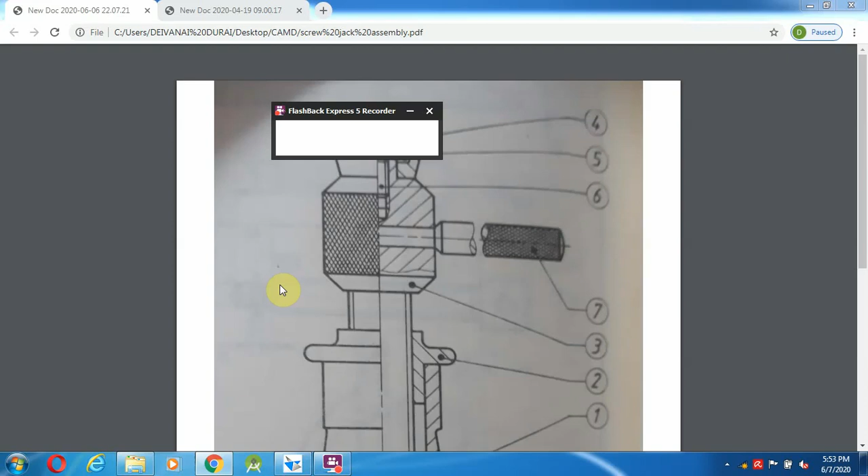So in this video we are going to discuss the screw jack. This is the screw jack assembly diagram.

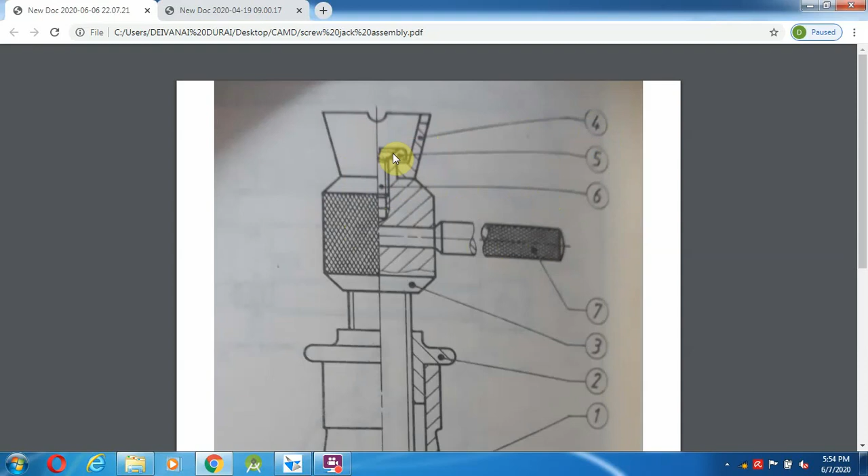So first I am going to select the assemble, where I am going to save the file, I am going to retrieve. So from desktop, I am going to bring the file from screw jack.

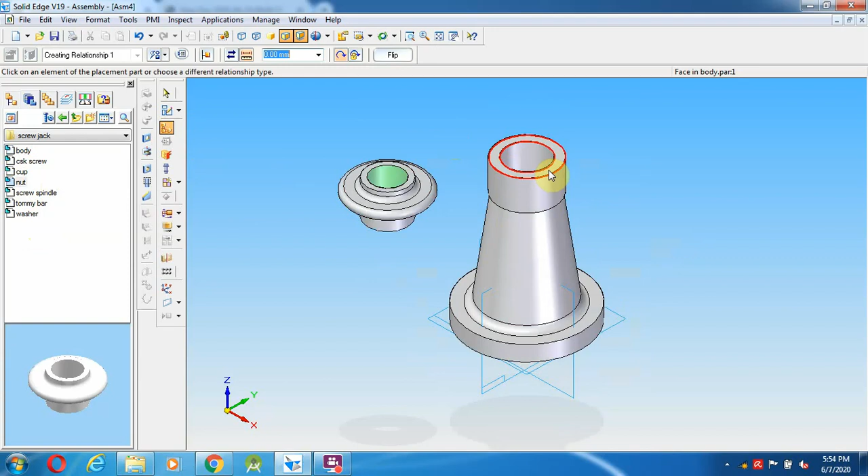So I am going to bring the body part. After bringing the body part, above the body part I am going to place the nut. Select assemble, so the bottom of this part has to be placed over here. So that I am going to align first. After that, give the axial alignment, this as well as this, so it has to be fixed.

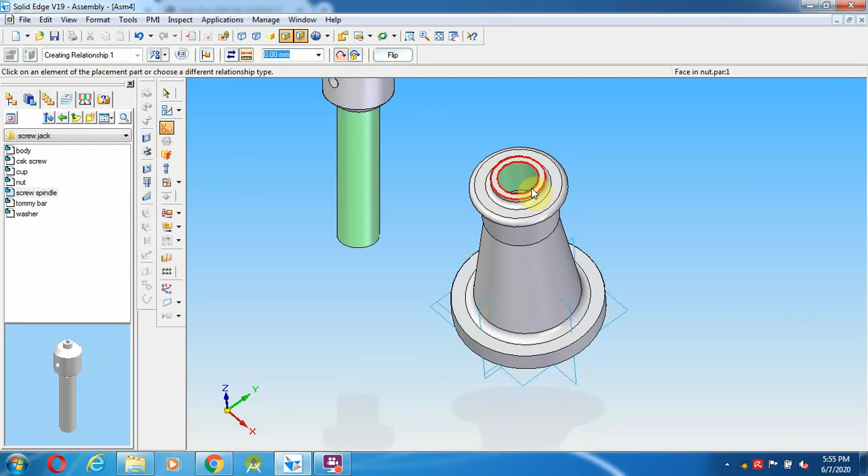Then goes to the next one. Above this, the screw spindle has to be placed over here. So screw spindle, same concept, from top surface. Rotate this in the top surface. I am going to place this one.

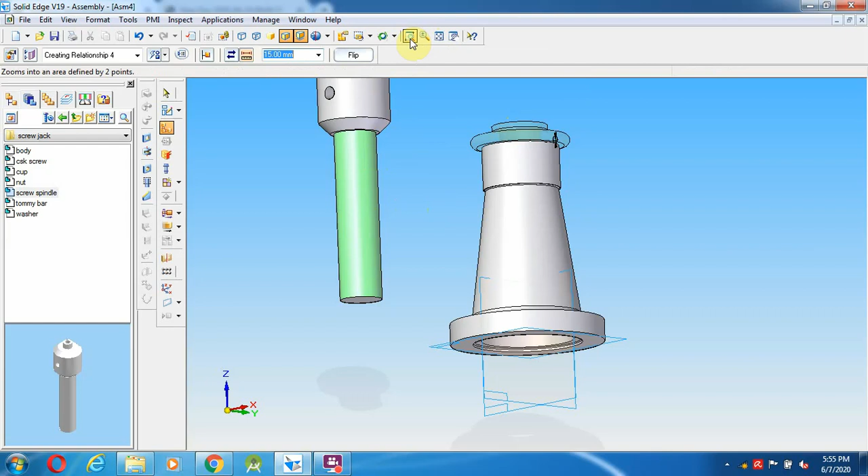So now what happens, this screw spindle may move up and down. So what I am going to do is give a certain distance, some 15 mm distance. Even you can place it above this also, it's not an issue. So for certain distance I am going to give it, then I am going to give the axial alignment, this as well as this one.

After that going to bring the cup, it is placed above the screw spindle. So above that the bottom has to be placed, and the axis of this, fit, and this has to be placed over here.

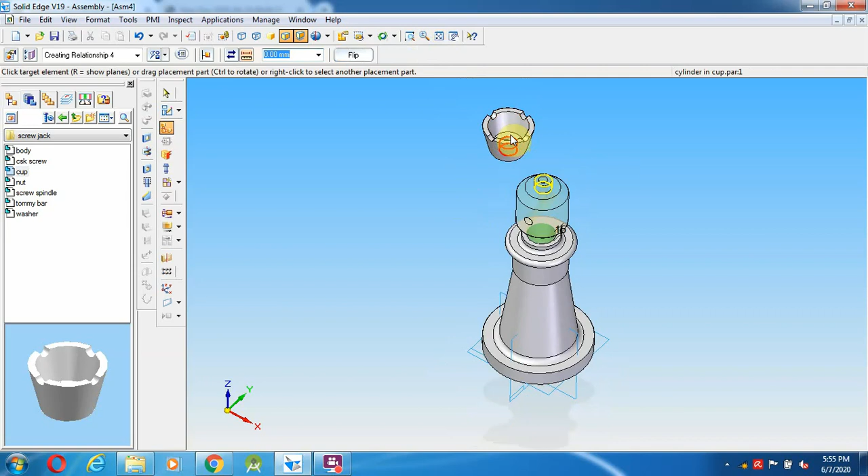Now what I am going to do, the next thing is inside that I am going to place washer and CSK screw. So washer and CSK screw I am going to do as a sub assembly over here, because inside it's very difficult to choose the part. So these things I am going to do over here, this as well as inside. And now selecting the thing is very important.

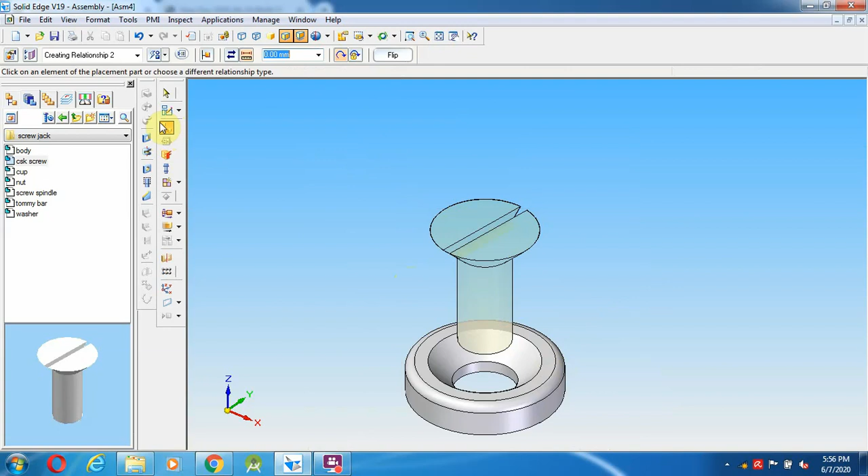Select assemble, the top of this it has to be placed over here. Give fit. So after giving the fit, I am going to rotate. So select assemble.

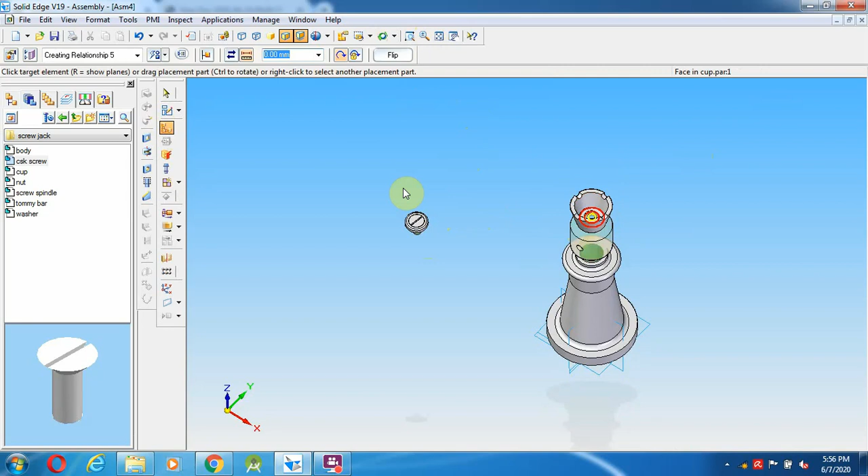So first I am going to select the top of that particular screw spindle, this one, then rotate the bottom of this washer. So once it has to be aligned, again I am going to rotate. So now axial alignment, the cylindrical one here, even this also can select, it's not that it has to be aligned over here. So after aligning this, all these things are very simple.

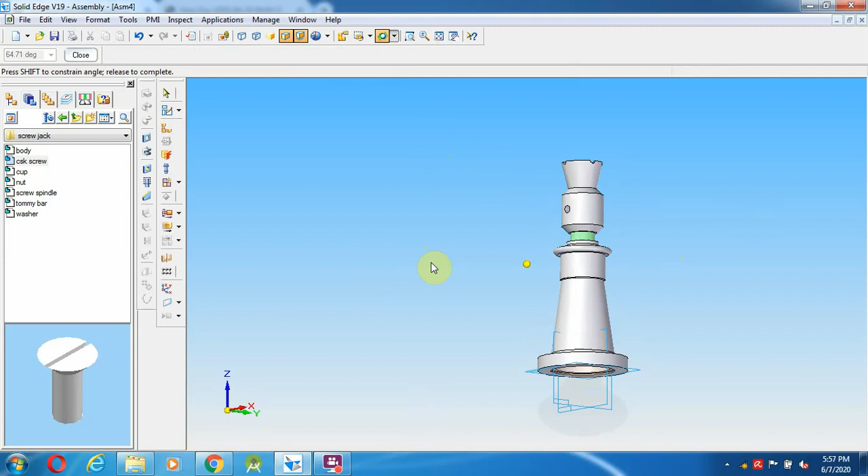But the thing is there's one certain concept you have to remember while fixing the Tommy bar. So select the Tommy bar, going to rotate. So select assemble, this axial alignment, and flip, so the other side.

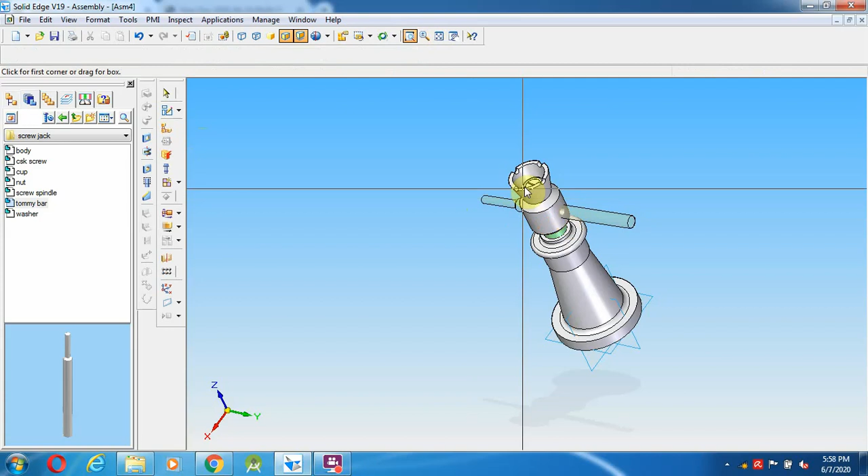Okay, now going to select this particular one into this particular hole. This hole is not selecting, so going to do undo.

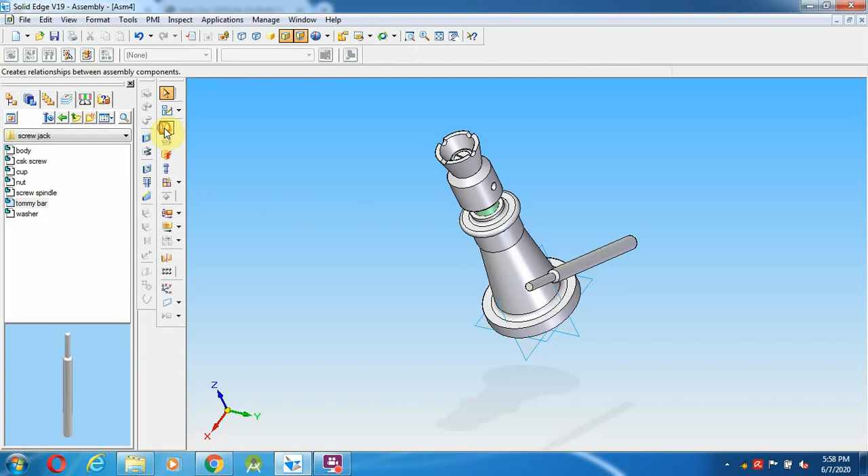So first going to try this one as well as this particular hole, or otherwise for the Tommy bar I am going to select assemble Tommy bar and go here as the flash fit relationship. So this relationship I am tying. First I am going to rotate, where it is coming over here, exactly this end.

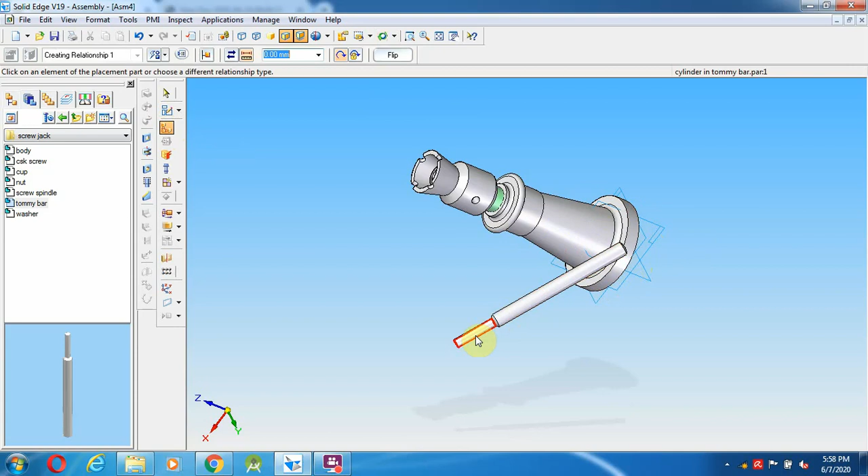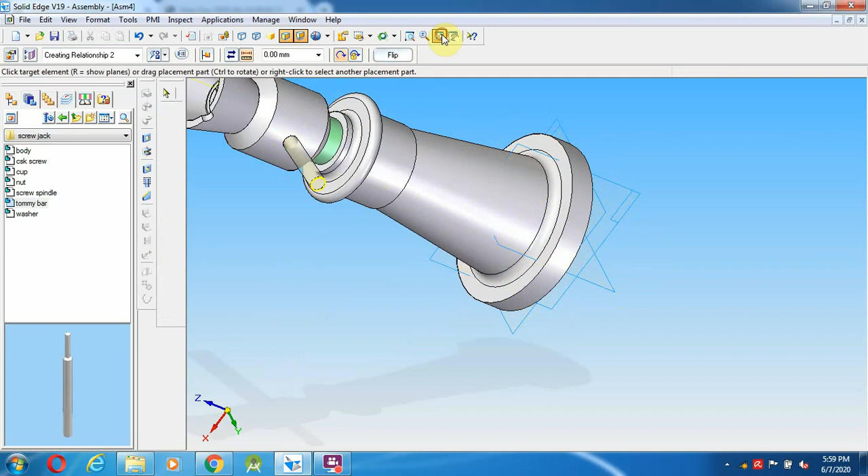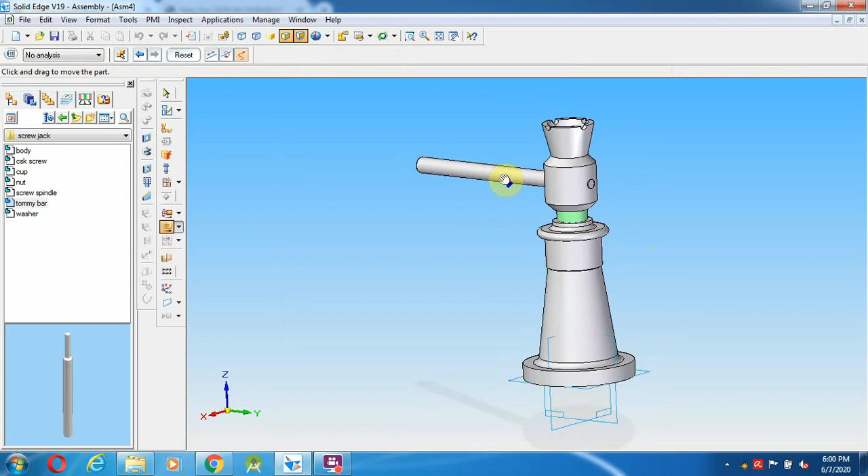Otherwise I'm going to do one more thing, so here that move part, the part has to be moved over here. I'm going to try to fix it over exactly in the end, almost it has to be fixed. So like this way we can assemble this Tommy bar.

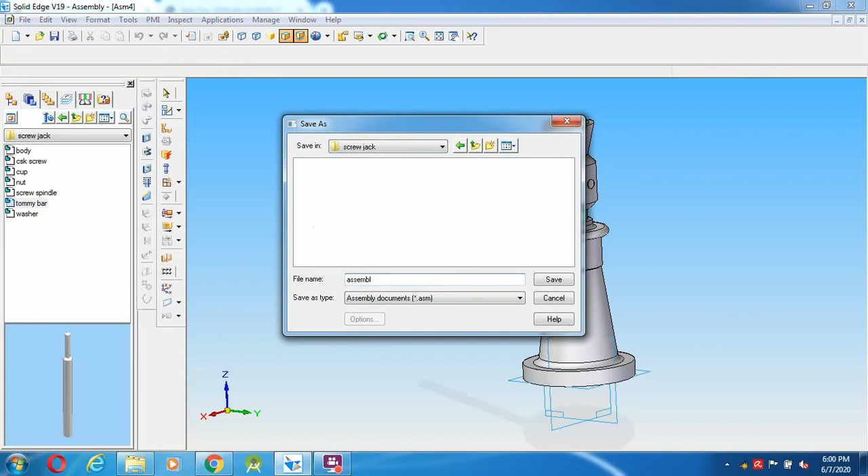Then we can save as, this will be, I'm going to save in the desktop, screw jack assemble, and going to save. So after saving this, go to converting into the 2D view, create drawing.

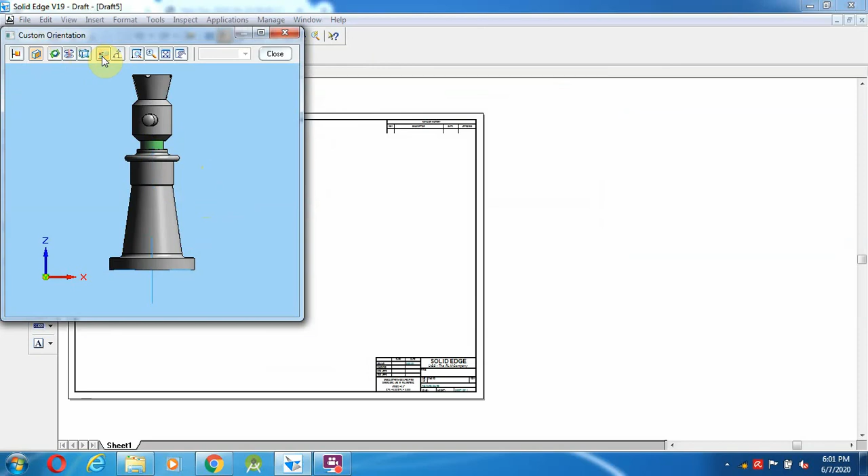And next front custom. So now I am going to turn this into the other side. So here, any other thing is there, we'll check it.

Going to turn like in the manually. So almost it looks like a front view.

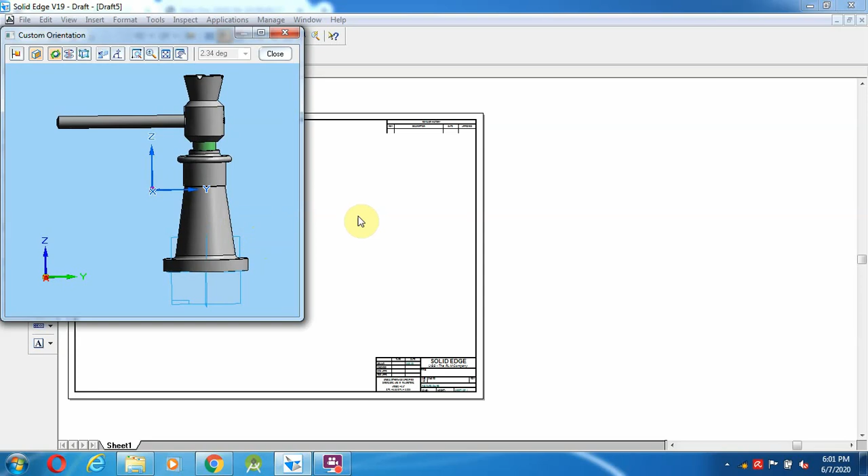So close on top side, and this one like a trimetric view, isometric view I'm going to place over here. Then I'm going to change the sheet setup into the A4 size sheet, show background off, give OK, and fit. So this I'm going to place over in this one. See, once I move the top view, along with that it's moving over here, so the relationship won't change over here.

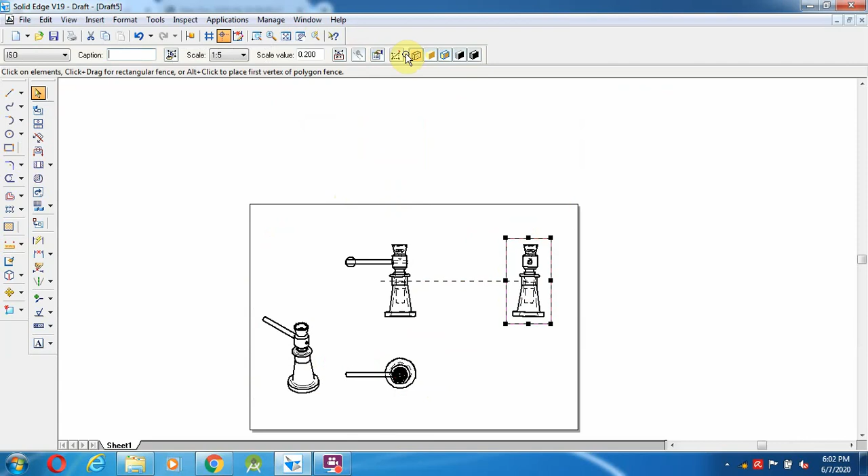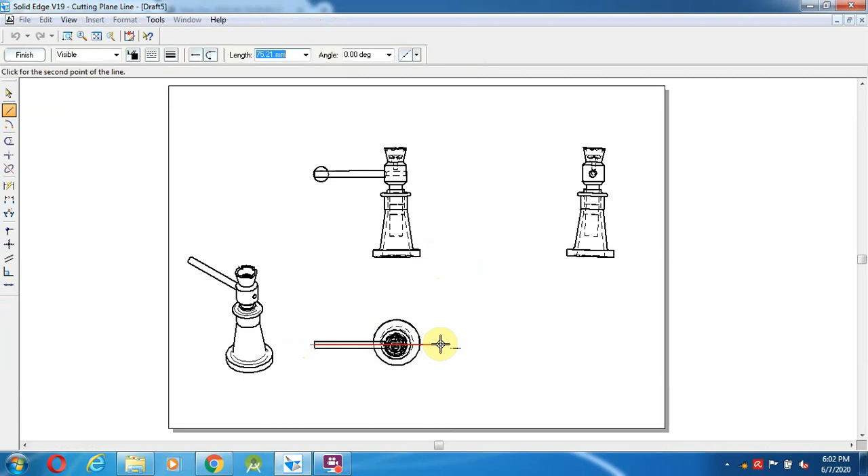So once after done these things, I want to create the sectional front view. That means cutting plane you have to create in the top view. So select top view, from here to mid one, exactly in the mid one I'm going to draw a line and finish. So either this side, then after that go to the section view, select the thing, I am going to place here. So the sectional front view has to be created over here.

So after creating this, come to this one like a screw jack, go and select this particular thing, the solid part, and come over here, right click, update view. So this has to be updated over here. So like this way we have to convert into 2D view.

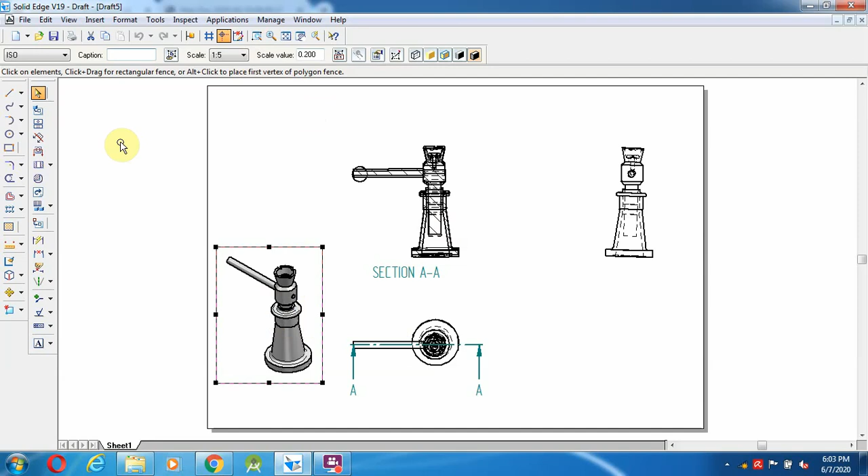So here these are all the things, 2D view, the isometric we have converted into 3D view. So in the final sheet we have to provide both the 3D view as well as the 2D views. So this we can save as. So with that the assembly gets over. Okay, so we're going to stop here. Thank you.